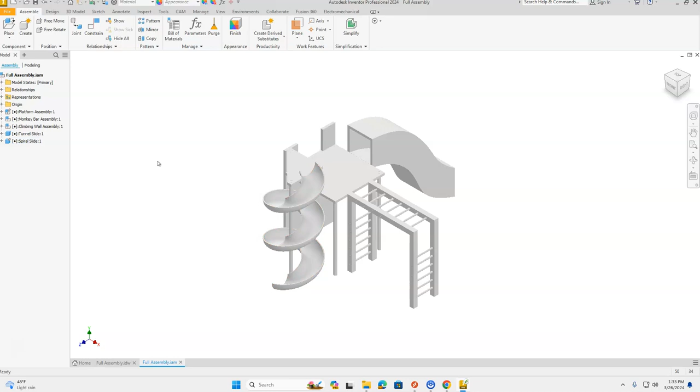Next we're going to add our crayon poles. Let's go up to our ribbon bar in the top left corner and find our crayon poles in our H drive. We needed 13 of them: 1, 2, 3, 4, 5, 6, 7 for the main platform, and 1, 2, 3, 4, 5, 6 for the tri-platform.

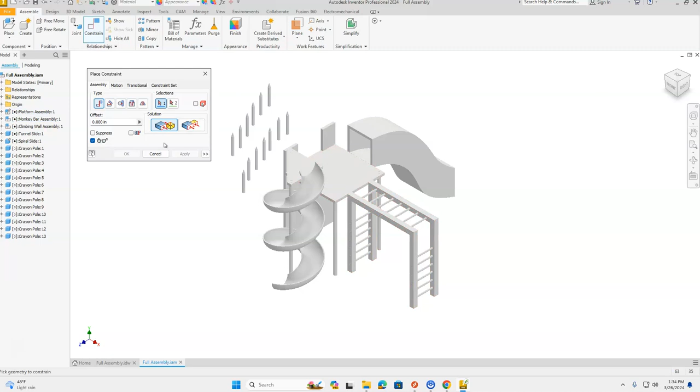The first thing we're going to do is take these 7 and place them on the main platform, then we'll show you how to put them off to the edges. So we're going to constrain first. We want to mate the top of the main platform, and then we're going to rotate.

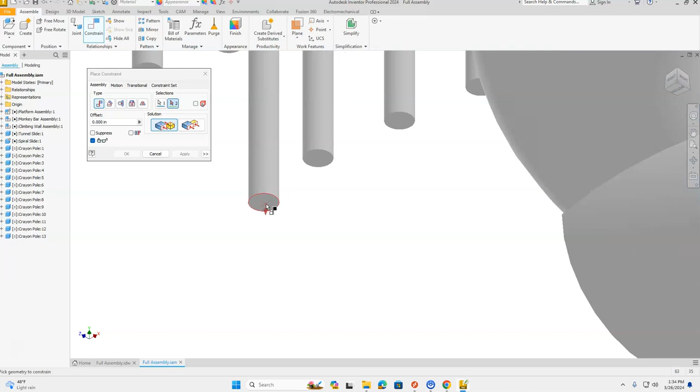We can do that by clicking the bottom edge corner of our world view cube, and we're going to go to the bottom of one of our crayons. We want to zoom in enough so that we get that red arrow pointing out the bottom. If you're not zoomed in far enough, you're going to get a green dot, so make sure you get in far enough to get the red arrow.

Okay, that put it up there. Click Apply. Now since we're already at this rotation, we're going to click the bottom of one of the crayons, go home, and click the top of the main platform. We'll keep going back and forth with that and click Apply. Now we can see the top of the main platform, and we're going to click that for a mate.

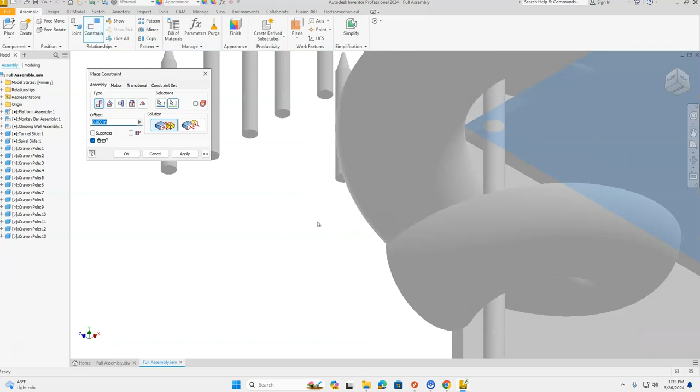Click the bottom corner of our world view cube, or you could use the free orbit tool, and click Apply. Click the bottom of a crayon, go home, click the top of the main platform. Some of these get kind of off to the side a little bit, so click Apply first, and we're just going to keep going.

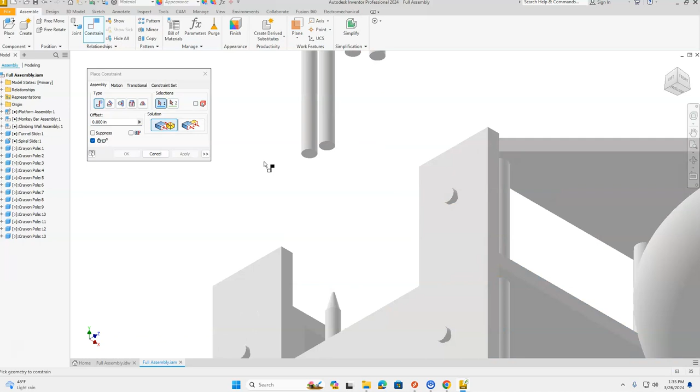Main platform, rotate, click on another side, bottom of the crayon, apply, bottom of the crayon, home, main platform. You're getting the idea here. Main platform, we have one more crayon left to go, and that should be our 7th one.

Go home. Now we're going to take a look at how to place these crayons out to the edges and out to the side. We're going to do that with what's called a tangent constraint.

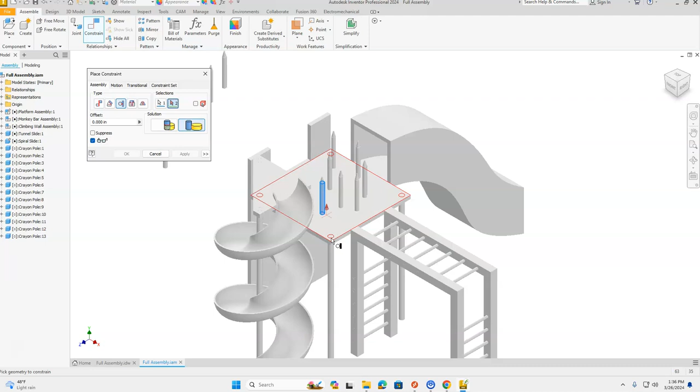It's this third one in from the left in the constraint window. Click on Tangent, and we're going to select the outside of one of our crayon poles to the outside edge of our main platform. If you take a look at that, it puts it off the actual main platform, so there's another option: this one is outside, this one is inside. You can see how that now places it inside the main platform. That's what we want. Click Apply.

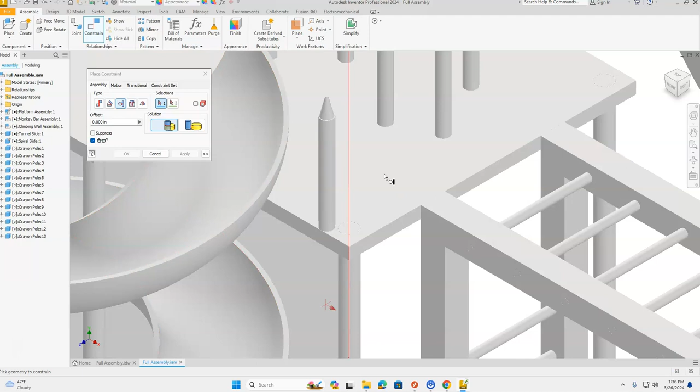For the corner ones, we're also going to do another tangent constraint because this one is tangent right to this edge. We're going to do the outside of the crayon pole to this side, and it's going to place it right in the corner. Click Apply. We're going to do the same thing with the next one.

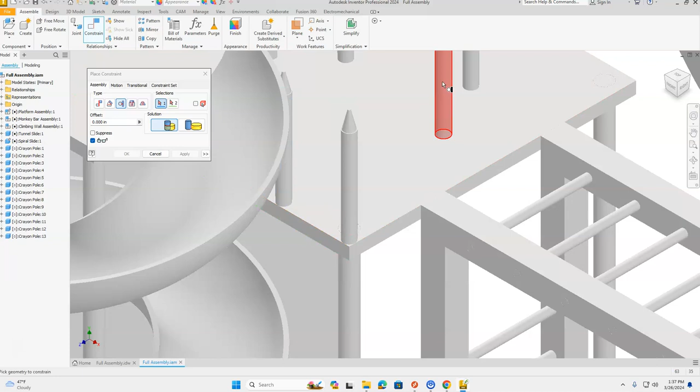There's one over here. Click Apply. This crayon pole, the outside of the main platform here. This crayon pole, whoops, click Apply. This crayon pole to the outside of the main platform over here. Click Apply.

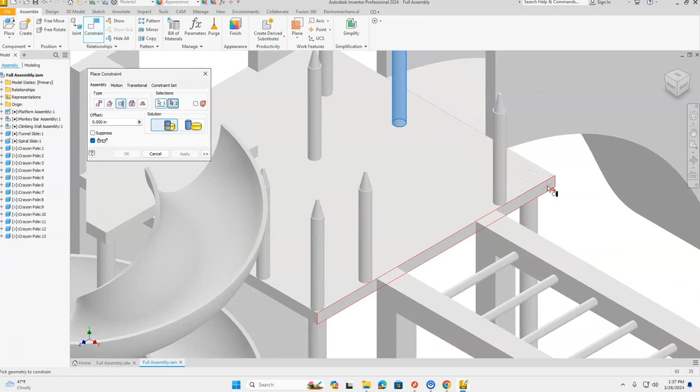Outside of this main platform, outside of the crayon pole to this main platform. We're going to use the world view cube, click the top right corner, or use the free orbit tool to spin this around so we can see that other surface. Click Apply, and we want to be tangent again, outside of the crayon pole to outside of the main platform. We're going to tuck another one in here. Click Apply after each one.

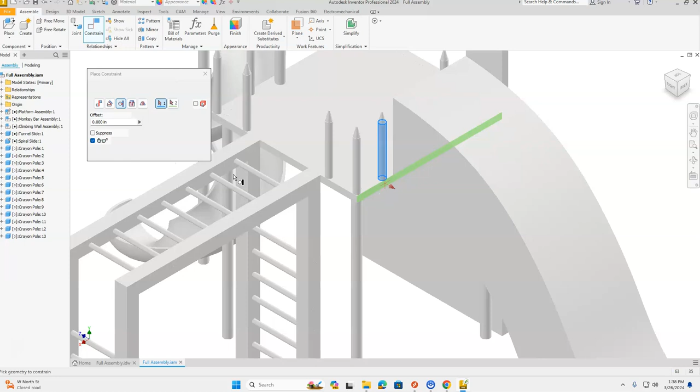If it won't go on, make sure you're clicking apply. Let's rotate to the next corner. If it won't go on, make sure you're looking and zooming in close if you can't get that edge to come out with the red arrow. And apply. Okay, what was that, 7?

I kind of lost track myself. Let's see if we have any that are not in there. So we have our 1, 2, 3, 4, 5, 6, 7 of them on there. We also have 6 more to put on this tri-platform.

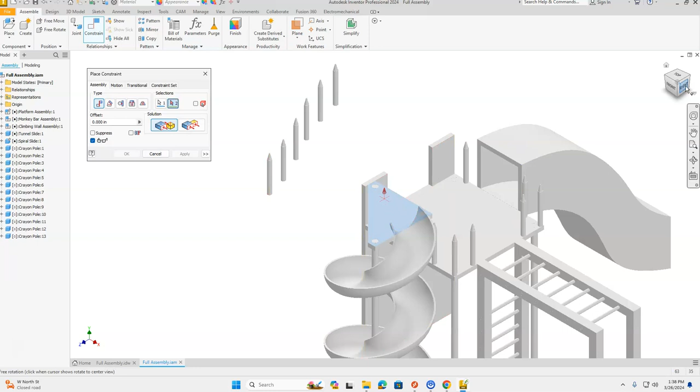Let's start off with that constraint first and mate the bottom of the crayon poles to the top of the tri-platform. So top of the tri-platform, click that bottom corner in our world view cube, or you could use your free orbit tool. Bottom of the crayon pole, apply. Bottom of the crayon pole, make sure you're getting your red arrow.

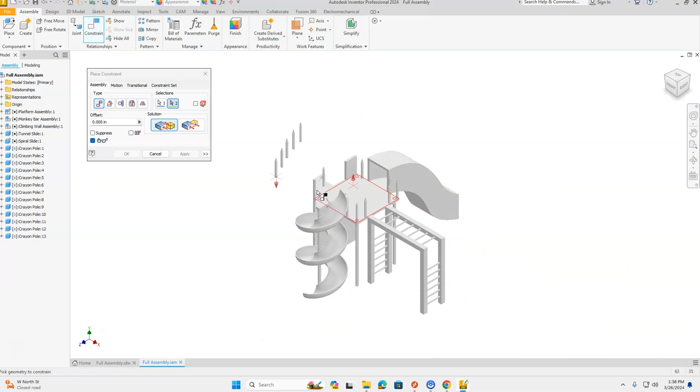Go back home to the top of the main platform. Continuing on, apply, top of the main platform, rotate around, zoom in, bottom of the crayon when we get the red arrow pointing out, click apply.

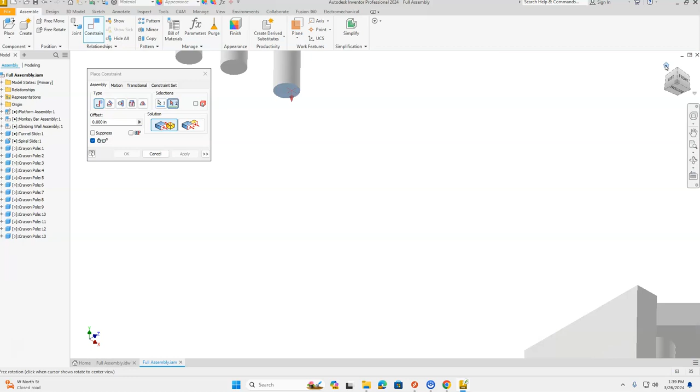Bottom of the crayon pole, go home, top of the tri-platform, apply. Top of the tri-platform, rotate around, bottom of the crayon pole, click apply, bottom of the crayon pole, and hopefully this is our last one. Top of the tri-platform.

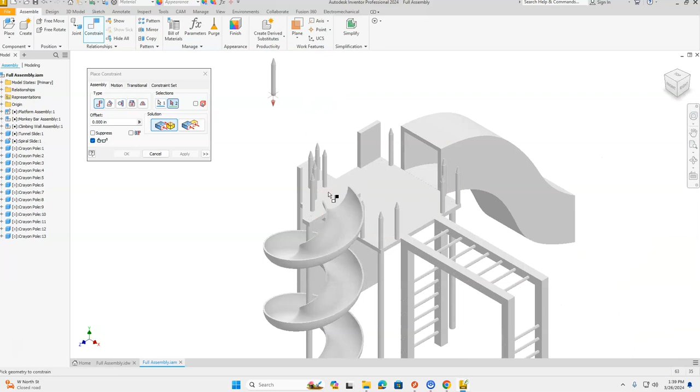Click apply. Okay, let's start off with the ones that go tangent first. So once again, we're in our constraint window. We're going to go to the third one over, tangent constraint. We're going to go outside of our crayon pole to the outside of our tri-platform.

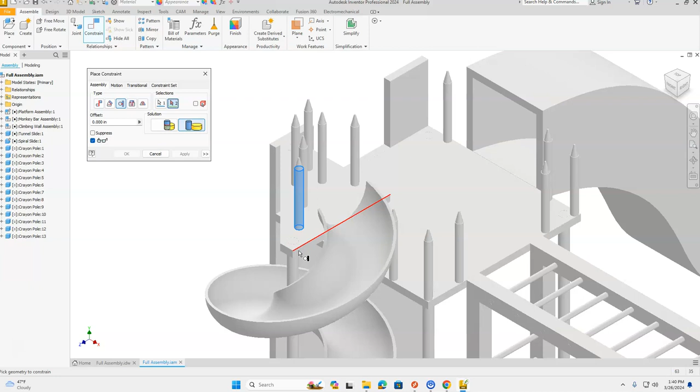And we want to make sure we're on the inside, so select the option for the inside constraint. And apply. This one can go in the corner, so we're going to also do outside of the crayon pole, outside of the tri-platform on the narrow edge here, apply.

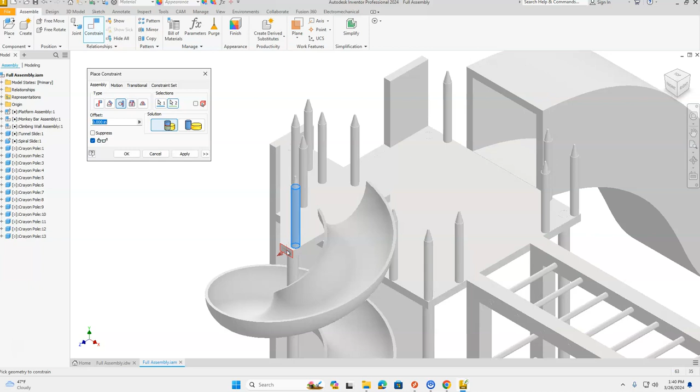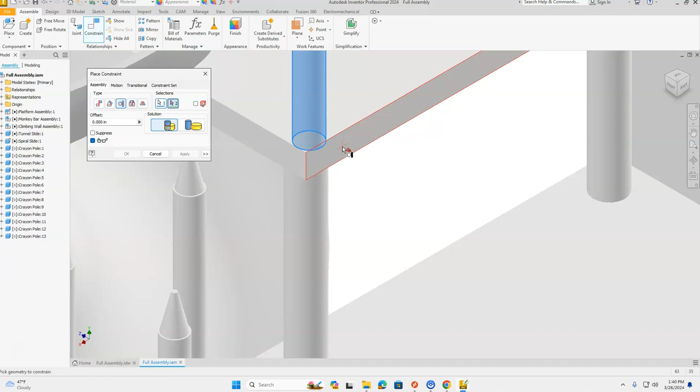Outside of the crayon pole, outside of our tri-platform, apply. Let's rotate around to the next corner, zoom back in, outside of the crayon pole, to this corner of our tri-platform, apply.

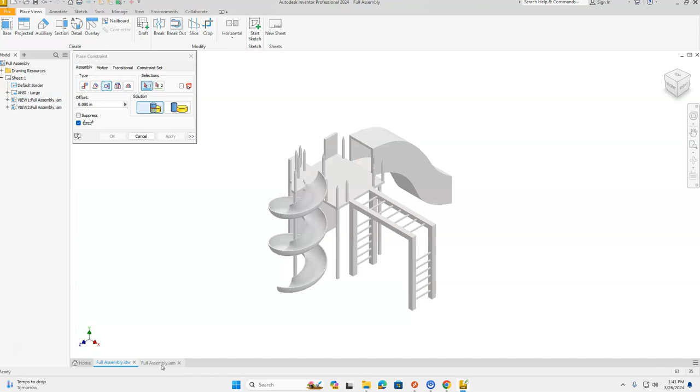And let's see what else we got here. Let's go back to our reference drawing so that I can see where they should be placed. We also have 1, 2, 3, 4 of them along this angled edge. So going back to our drawing, let's rotate that around.

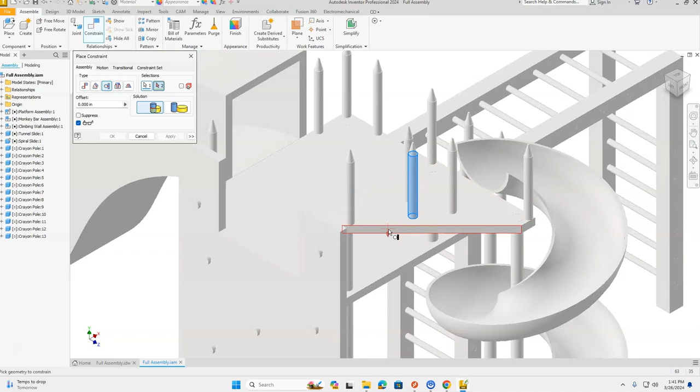Zoom in a little bit. There's my 4 crayon poles. Tangent constraint, inside, option, and we're going to go outside the crayon pole to outside of the tri-platform, apply. Outside of the crayon pole, outside of the tri-platform, apply.

You kind of space these evenly out. And here's our last one. Click apply. Press cancel on our constraint window, and let's go home.

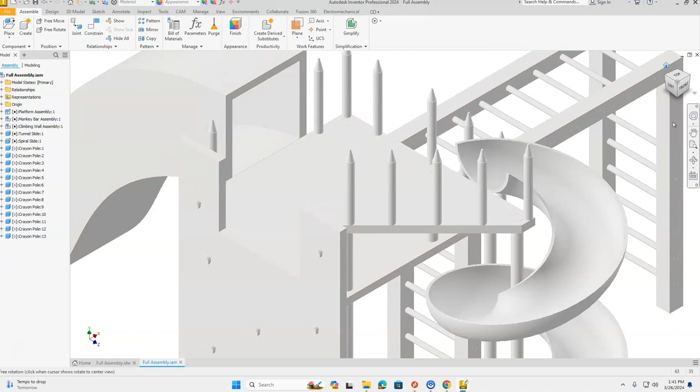Okay, we have all of our crayon poles added on there. However, our crayon poles are constrained to the edges, but they still slide. So if you wanted to move any into place, that would be great. And then once we have them where you want them, then we're going to lock them all down and into place. Okay, happy with where they are?

Next, I'm going to go over to my model browser on the left-hand side of our screen, and you see a list of all the crayon poles that we put in there, all 13 of them. We're going to take and ground all of these. To do that, I'm going to click the top crayon pole in the list.

Now if I click the next crayon pole, it's not going to select both of them. So to select them all, I'm going to hold the shift key down on my keyboard, and I'm going to click 1 and then click 13. And that selects all of them. On the blue icon in front of them, I'm going to right click with my middle finger on the mouse, right click, and I'm going to go down to grounded.

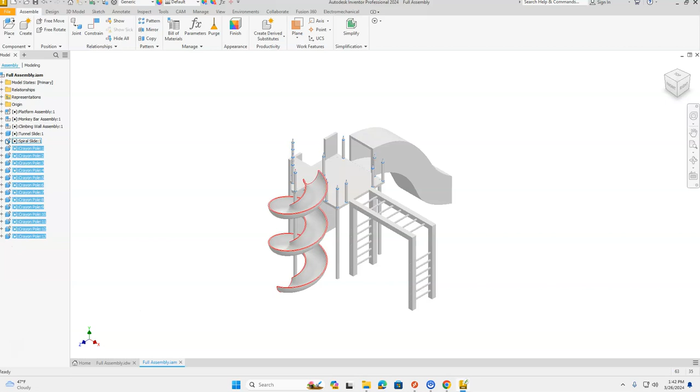Push pins go in all those crayon poles, and when I come over to one of my crayon poles, they're locked into place and do not move.

Okay, we now have finished our Inventor Playground. You did a great job. Boy, I bet you if you stood up and said, 'Woohoo, I'm done,' your teacher would give you a nice treat.

Congratulations on creating. Before you stand up and go woohoo to get a treat from your teacher, let's save this. Go up to the orange file, go down to Save, and we're going to update these changes. You are complete with the playground assembly. Congratulations.